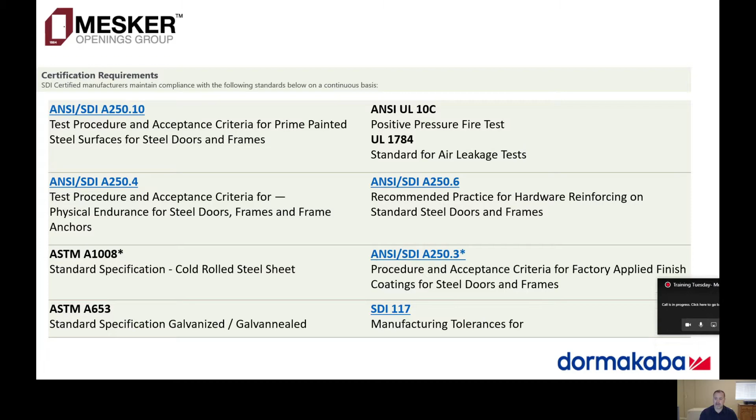This company is SDI certified, and unlike many other companies out there, they don't just provide material that meets SDI standards—they're actually SDI certified, so they're never going to make that false claim. That SDI certification means quite a bit, especially with testing for tolerances, testing for twist, bow, and other defects. Having that SDI certification means not only that you have a certification behind you, it also means that your products have been tested in a rigorous way so they can perform for you when needed. So we'll go through and watch this short video that talks about SDI, what that certification is, what it means, and that sort of thing.

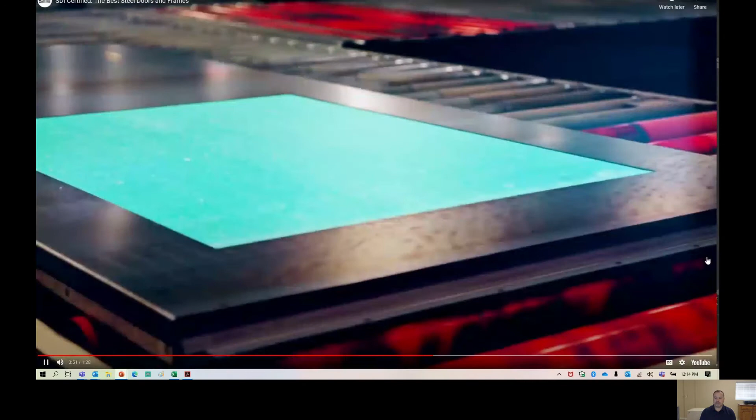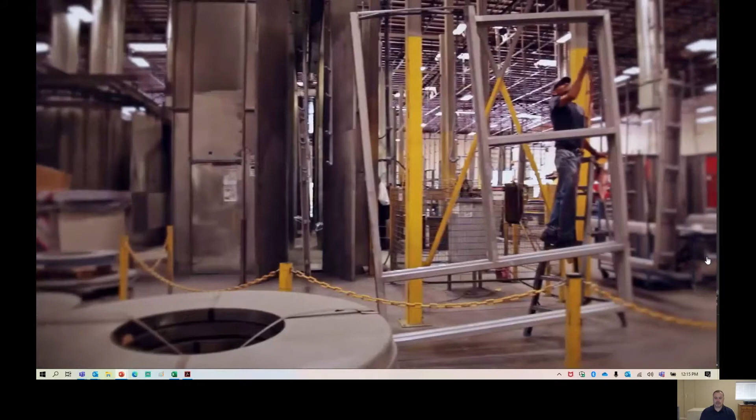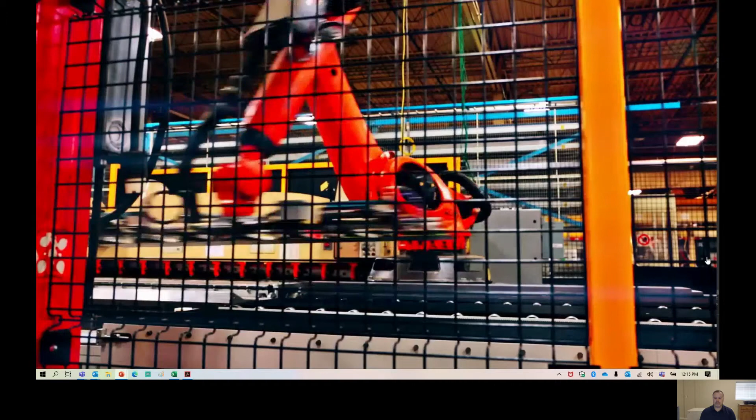Doors are one of the few components of a building that people are constantly in contact with, and often provide the first impression of a building. Many of them are in use all day long. The fact is, some manufacturers make better ones than others. Choosing quality doors and frames helps ensure they look good and perform well for many years to come. Specifying to ANSI and SDI standards is a great first step, but how do you know which products actually meet those standards? To ensure architects receive the quality of product they specify, the Steel Door Institute has developed an industry certification called SDI Certified. The manufacturers with this certification are audited to verify their manufacturing processes consistently produce quality products. Their steel meets ASTM industry standards. The fabrication, finishing, and physical endurance comply with ANSI and SDI standards. Many of the most respected steel door and frame manufacturers are now SDI certified. They make standard, custom, and specialty products available in 50 states and around the world. Architects can specify SDI certified and know that the doors and frames in their buildings will be built to last.

What does that mean as far as SDI certification? Basically, SDI means that those products are tested, they're reliable, and they hold that backing from the Steel Door Institute that shows they are quality.

Some of the members of SDI are very familiar to you, like ASSA ABLOY companies such as Ceco, Curries, Security Metal Products, and Allegiant products, which includes Steelcraft. But there are also some no-name or smaller companies out there that are SDI certified that we primarily see in the South, but also up here, and those are Dean Steel, DCI, Republic, Pioneer, and MPI.

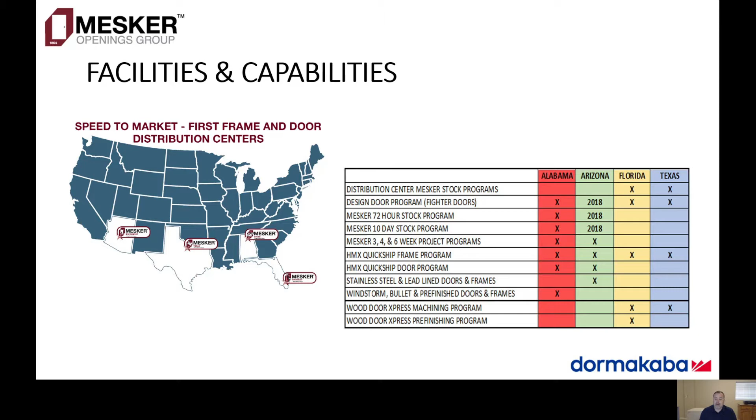If you look at Texas, they have their Mesker, all of Mesker's stocking products, such as your standard hollow metal frames, 4 7/8, 7 1/4, your flush doors, your 4070, your 3070 - just your standard material. But then they also have the hollow metal quick ship frame program, wood door express machining program, and I believe they now also have their hardware piece associated with this as well, especially Mesker out of Texas.

So Mesker and Hollow Metal Express, what are the differences between the two companies? Mesker is going to be your contract house. Basically, it's going to have all of your stock materials, even if they're not providing those stock materials in 1 or 2 days. If you have a large contract order that's going to require 20, 30, 40 frames or doors, they're going to provide those in a standard lead time. Check with your factory or your local rep prior to placing that order to find out what those lead times are currently, because they are ever changing, especially now that we are opening up new branches. So check with us prior to placing that order, so we can give you a reliable answer.

Hollow Metal Express, on the other hand, is more of your custom house. There are some things changing internally right now, but currently they are your source for custom hollow metal. Mesker does custom hollow metal as well, but Hollow Metal Express is going to do your lead lined doors, your stainless steel doors, your custom windows, your custom lites, and things like that. And they're going to be able to do those a lot faster than Mesker will.

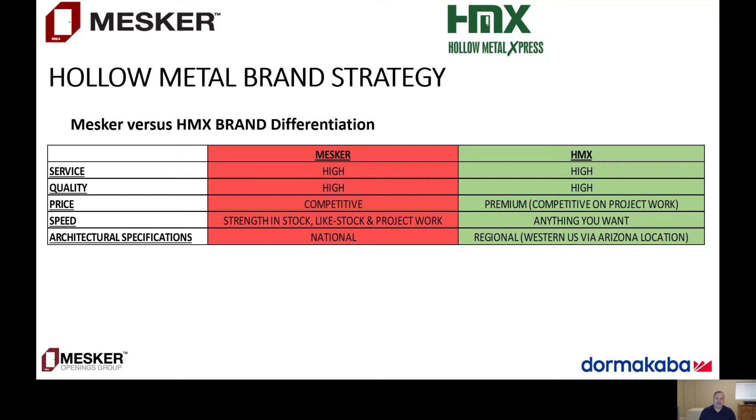Mesker, I was saying this in our Training Tuesday meeting, but I'll say it again. Mesker is a company that has hidden Meskers across the United States, and there are actually websites out there, not brand associated, run by people with an architectural background, who go out looking for hidden Meskers, openings, hollow metal storefronts and things like that that have been lost throughout the process. You really have architecture out there that's been around for 100, 150 years, and some of those hollow metal storefronts out there are Meskers. That's the name they've become known for. But Mesker and their hollow metal storefronts are very special. They're nationally known, they're in most specifications, and if they're not in a specification, they're very easily written in.

So let's talk about doors and how doors are constructed. I have a door sample here. I'm going to be switching screens, so bear with me. As you see, I'm grayed up, so technology sometimes is a problem, but we'll get through it as best we can. I'll switch back and forth so you guys can see me. Again, bear with me. So, door construction.

As Mesker will claim, they use a standard of 18 gauge hollow metal. They do have 20, 16, 14, and 12 gauge available in their doors. 20 gauge is going to be your low end commodity style door. 18 gauge is standard, your standard interior hollow metal door. I would not suggest it for exterior use, but it does have a place at exteriors in strip malls and things like that. Most exteriors are going to use 16 or 14 gauge, and your extra heavy duty is going to be your 12 gauge.

There's going to be very low instances when you're going to need a 12 gauge door, but I would say at bullet resistant openings, windstorm rated openings, tornado openings, things like that, you're going to see those openings there.

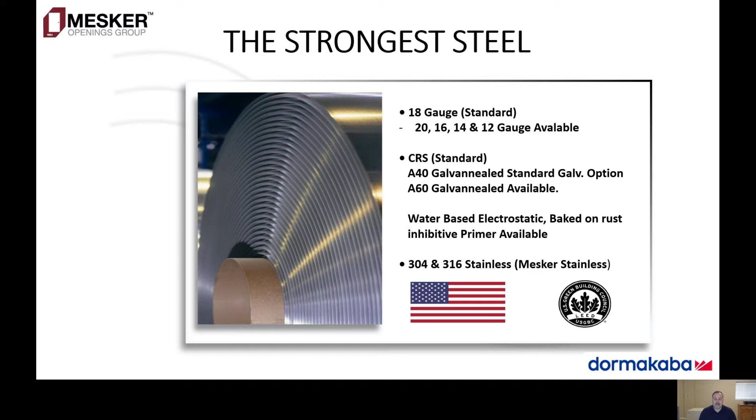Their standard is a cold rolled steel. They do offer an A40 and an A60 galvannealed. Their primer is going to be a baked on rust inhibitive primer, which is standard in the marketplace. And they do offer a 304 and a 316 stainless steel hollow metal door.

The way that they build their doors is going to be the pan and lid design. It's a standard design, also standard across the marketplace. We're going to talk about a door called the NVS that is a little bit different in some later slides, but the standard one we're going to talk about now is the pan and lid, and I'll show you how it's built in just a second.

The design of the door is an adaptable non-handed design, which is their standard. What that means is it's square edged on both sides, and it is adaptable. So if you need to plunge through at your hinge pockets and things like that, you can switch the hand of that opening. They do have it plunged through already as part of their standard, so you can rehand it. But if you have a situation where the door is handed, you can modify it in the field to make it work, just in case you wanted a right-hand door and actually needed a left-hand door.

They do offer a beveled hinge or a beveled lock edge and a beveled hinge edge. It's an option, and I believe it's 1/8 inch on 2.

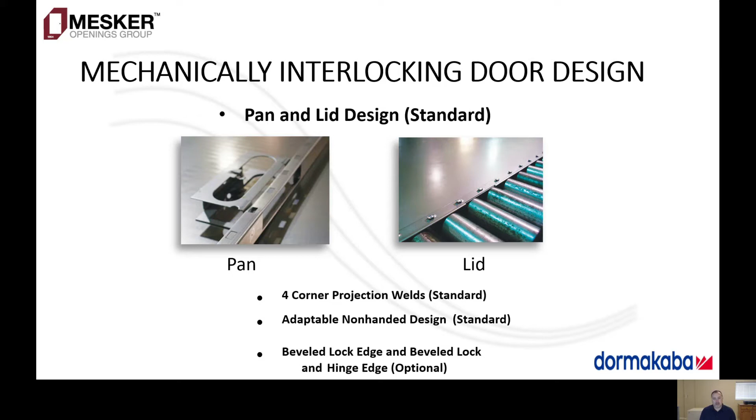So looking at the pan and lid, you can see the bottom where it's bent. It's bent twice, first to create the lock edge or hinge edge, then bent again to receive the lid, and that's your stability point at the lid. You see at the bottom there, that's where they weld it together. It's tack welded all the way down, sanded smooth and finished.

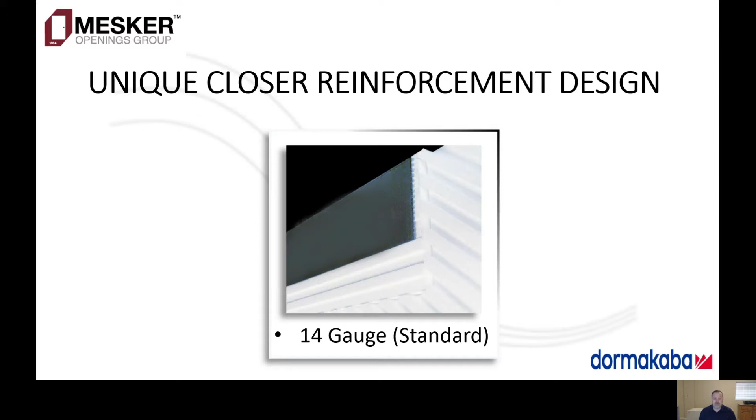They do have a unique closer reinforcement. If you look at this closely, it's a 14 gauge standard reinforcement, but that closer reinforcement is a little bit different than you normally see on hollow metal doors. If you look at the polystyrene around that hinge and closer reinforcement, you notice that it has treads in it, and at the closer reinforcement the treads are actually opposite. What that does is provide more stability, not only with the closer reinforcement itself, but also from that tread, so it's not just a piece of material that's stuffed in and welded on.

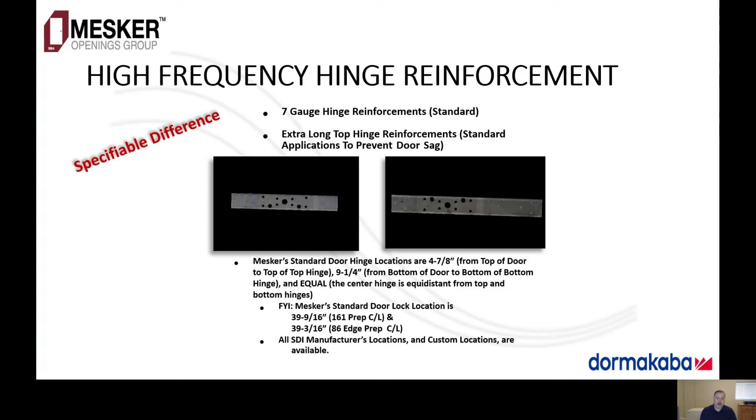They have high frequency hinge reinforcements made out of 7 gauge material. That high frequency reinforcement prevents the sag and things like that on the door. So if you have a heavy duty door and things like that, all the weight is at the top of the door, and this will allow you to hang that door without worrying about your hinge breaking or failing in the process.

So this is where I'll change to the video. I'm going to show you a couple things, but please look at the inverted and the flush top cap, and then we'll take a look at it real quick.

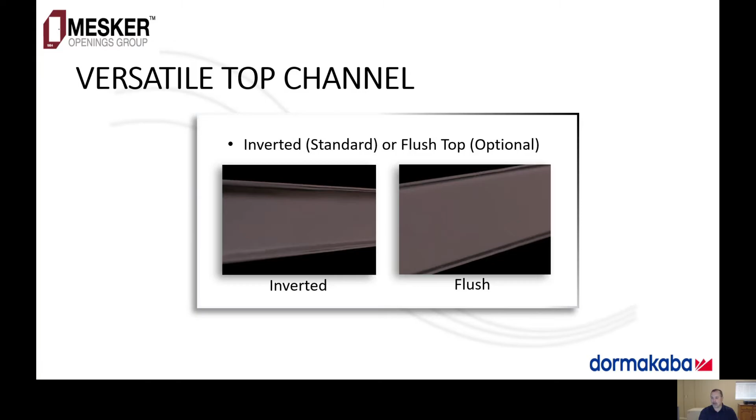So, hey there, I'm back. Like I was saying, take a look at the top cap here. This shows a top cap, and if you take a look at it, you'll notice that top cap has a hat channel at the very top, and that's this right here. What that does is whenever you slide this on top of the door—and I actually have a sample of a door—when you slide this on top of the door, like so, it creates a flush top. I mean, honestly, like that.

This door sample is going to be used for something totally different. It's not the top of a door, but if you look at that hat, on the edge of the door where that reinforcement is, it sits on it just like this to allow it to sit flush. If you look at the sides here, this allows it to slip into the top of the door and then compress to the sides, so you can install it into the top of the door with no need for screws. You can put this on flush and leave it as is, or you can dimple the top and screw it in for a screwed-in top cap, or you can weld it or tack weld it and fill and sand smooth, depending on what the specifications say. That way you can have any type of top cap that you want.

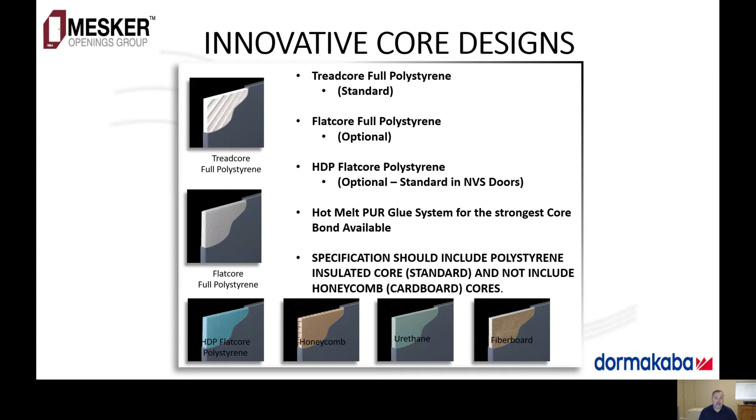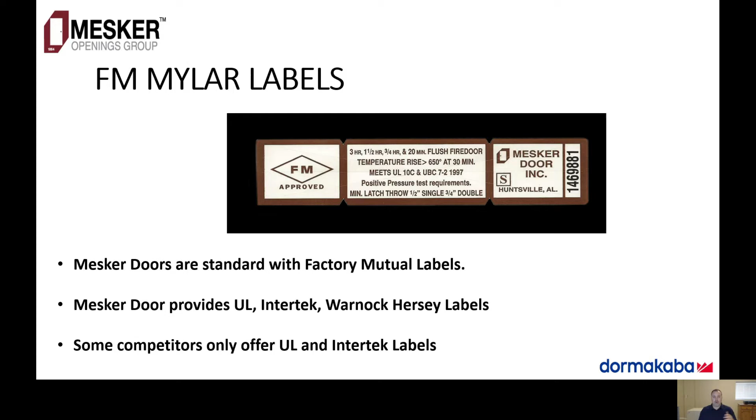Our fire rated openings are put on with a Mylar label. They are certified with UL, Warnock Hersey, and Intertek. Some other manufacturers out there are only available in one or the other - they're not rated with all of them. The N series, which is what we've been talking about, is your seam-to-edge door. It's a non-handed door that meets the requirements of virtually any opening, from sound deadening to energy. It meets and/or exceeds ADA, ANSI, ASTM and SDI. Their fire rated openings are 20-minute up to 3-hour, and they use Mylar labels and are also certified with Warnock Hersey and Intertek.

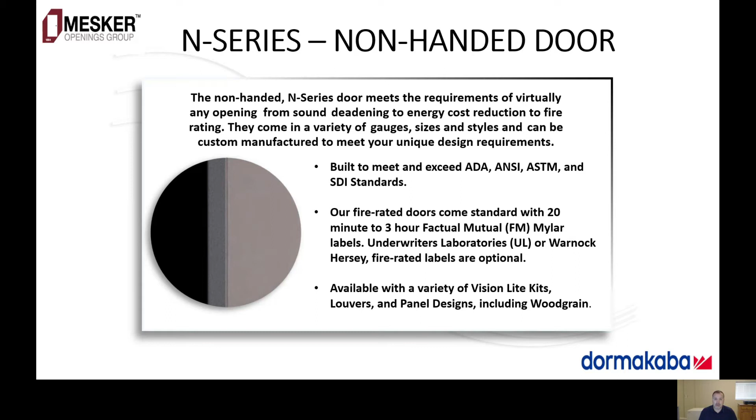They come with a lot of different standards, so depending on what your architectural plans say, they can do vision kits, wood grain at exteriors or apartments, and different types of panel designs if you need something more aesthetically pleasing than a flush hollow metal door.

They also offer a BV1, or beveled edge design, as an option. So if you do need a beveled edge, it's provided the exact same way as the square edge, just bent a little bit differently - it's an 1/8 on 2 inches. It's built to meet or exceed ANSI. They offer them beveled at the hinge only, beveled at the lock only, or beveled at both the hinge and the lock.

So let's take a look at some steel stiffened doors. Steel stiffened doors have been around forever, and Mesker offers steel stiffened doors as well. They offer it in their NVS, they offer it in their N series, but we're going to see some pretty strange things whenever we're looking at the NVS continuously welded polycore, the NVS steel stiffened core, the standard seam, and then the standard seam steel stiffened.

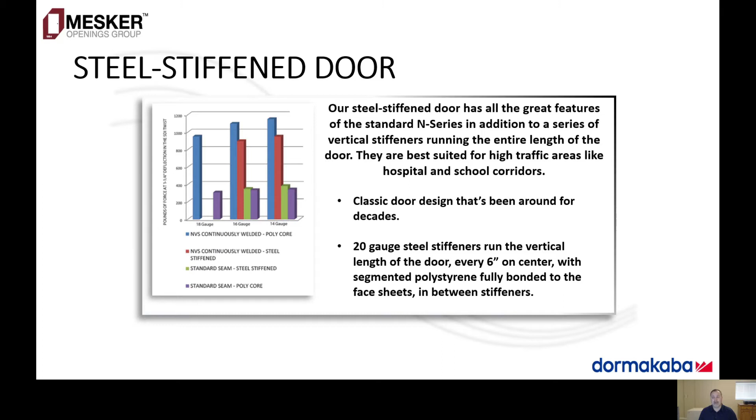Whereas we've seen with the standard NVS, not steel stiffened, that can hold over 1,000 pounds of pressure at their 14 gauge. And whenever it's recoiled, it's only out 1/32 of an inch. Unbelievable ability, with only one thing that's different on the door, and that is this right here.

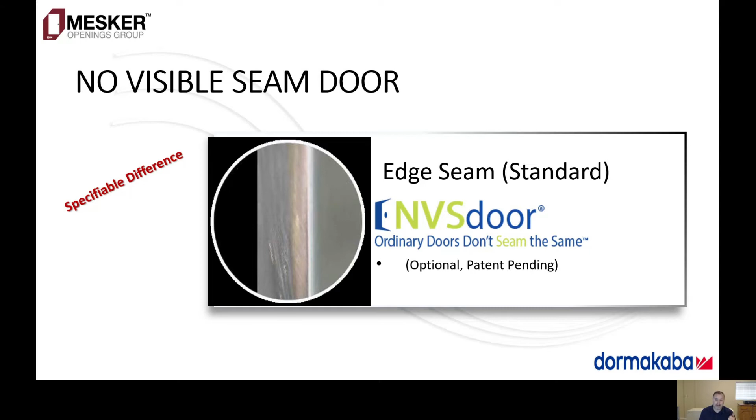The NVS offers an edge seam that's continuously welded vertically down the edge, and what it does is it provides a situation where that door has now become stronger because it's an entire unit, as compared to NVS that has steel stiffening, standard steel stiffening, or a standard door.

So to put that into a broad perspective, the NVS, which is fully continuously welded, is 3 times stronger than a standard hollow metal door. It has smooth faces. It's not like your seamless edge steel stiffened door, your seamless edge standard door, where you have a seam on the edge that's been filled or tack welded all the way down the field.

What happens is you get those pock marks or cigarette burn marks. I just call them defects, where you have those holes blistered down that edge. A lot of manufacturers will fill the entire edge, sand it smooth, and what you have is, over time, if that door does come under pressure, that stuff is going to crack off, break, or if you have to modify that door for any reason, it's going to fail, and you're going to end up having to rebondo, refill, and do all this work. Whereas with the NVS, it's continuously welded. You don't have to do that.

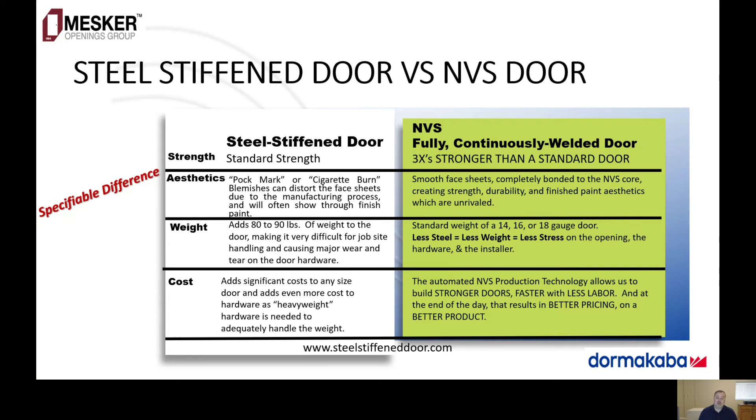So you're going to have a situation where you can close your door better, swing your door better, open your door better, and provide a better door at a better price. So the NVS door is something that is very unique, and I would suggest getting with your local representation, getting some quotes on those doors, and putting them in job sites, because your customers will start thanking you for it.

So as we talked about just now, we looked at the competition doors, and you see that seamed edge, and then you see how it's filled in later on. They have to fill that entire thing, because if you just fill in that small little crack and try to paint over it, you're still going to see that crack. If you look at the NVS door, they continuously weld it, and at the very top you can see that continuous weld. They sand it smooth, they finish it, and it's done, and it's done forever.

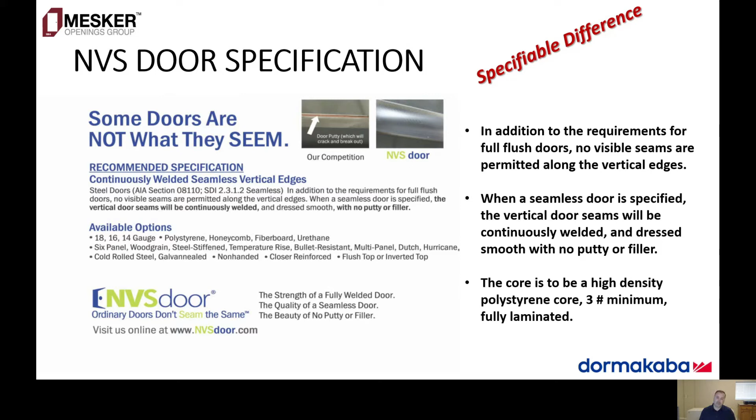I'm not going to go through everything here, but basically the NVS is available in all the same stuff that you would get your standard door in, but one thing, you can't get it in 12 gauge. It's available in 18, 16, and 14. You can't get it in 20, you can't get it in 12. It's available in 6-panel, wood grain, steel stiffened, temperature rise, bullet resistant, multi-panel, Dutch door, WINDSTORM, cold roll, galvannealed, non-handed. You have most of the options out there, but the two most notable things, 20 and 12 gauge, it's not there.

So the wood grain, very important. The wood grain looks like a wood door, but it's hollow metal, and it's able to be stained. There are factory finishing options available. I would suggest not doing that, but they are available. They're just expensive.

This looks like it's one of those situations where it's going to be in a multifamily style opening, and you have the top lock, the bottom lock, so you install this in multifamily. It's available in 20-minute rated or 90-minute rated, and it looks like a wood door. So you still get that aesthetically pleasing opening without having to compromise by just going with a wood door.

So let's look at some temperature rise options here. The temperature rise door series is with that HDP polystyrene core. If you look at the temperature rise or the heat transmission as tested by UL, their design in conjunction with premium fiberboard core will keep the side of the door not exposed to fire below 250 degrees for 30 minutes. This is superior to the competition, which is 400 degrees, which can remove human skin if touched.

So Mesker's temperature rise doors will keep the side of the door that's not exposed at a hot 250 degrees, but 250 degrees isn't going to melt your skin off when you touch it. So keep that in mind when thinking about temperature rise openings. Mesker's door keeps it at 250 degrees for 30 minutes, and that's very important.

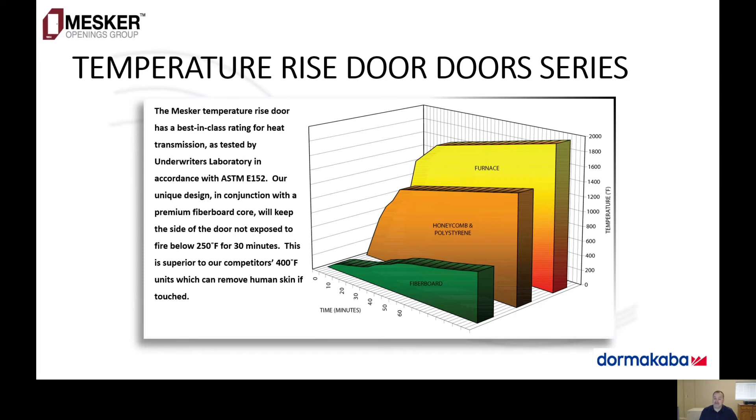Let's take a look at some Dutch doors. Dutch doors are available also, in the N series and the NVS series. One thing to note here, the Dutch door shelf is optional. You can have it either factory applied or sent with the door. But if you get that shelf, it's only available in 20 minutes.

And if you use this as a fire rated opening, 20 minute or 90 minute, you have to have a constant latching bolt at the top leaf. If not, it will not meet NFPA 80 or 101. At the 90 minute rated opening, the Dutch door shelf is not available.

Thermal performance, or their urethane core, and I switched up the temperature rise in the thermal, so I apologize for that. The temperature rise is your fiber board, which is typical in your fire rated openings. Thermal, which is going to be your R rated openings, is going to be the HDP urethane core.

Be careful with the urethane core, because you want to make sure that it is HDP, or a declared product, because urethane by itself is not very good for nature. The HDP, however, is going to be a declared product. It's recycled material and things like that. It's not, say, healthy for the environment, but it's not putting anything back into the environment that's worse.

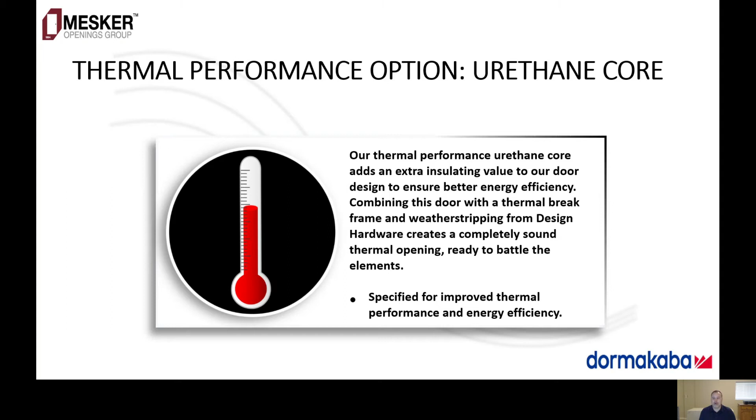So with their temperature, thermal rise, or thermal performance option, they offer this in thermal break frames and weather stripping from the design hardware group. It creates a sound thermal opening ready to battle the elements. They offer kerfed frames and a thermal break threshold at openings, creating a situation where the door stays cold on the outside if it's cold, or hot on the outside if it's hot, and cool on the inside. So it doesn't have all that release or transmission from your air conditioning unit, or that release of heat going through your building, which causes higher cooling costs.

They offer bullet resistant doors in level 1, 2, and 3. Level 1 is 38 caliber, small arms fire and things like that. Level 2 is up to a 357, and level 3 is your super power 44 caliber resistance. They offer these up to 4 feet in width, 10 feet in height.

We don't really worry about this too much in Colorado. They do have it in the eastern and southeastern portions of Colorado, but they do offer tornado or FEMA windstorm certified openings. Check with me prior to ordering those, because if it's windstorm certified, you have to order the entire assembly.

This is something that I hope we never have to deal with in Colorado: hurricane assemblies. This is something that they offer. So if you do have projects on the west or east coast that require hurricane certifications, we do offer those. Get with me and we can talk through those.

So for frame construction, I have a big sample of a frame. I'll run through these pretty quickly, but I really want to show you the sample, because that's where the meat of the whole thing is.

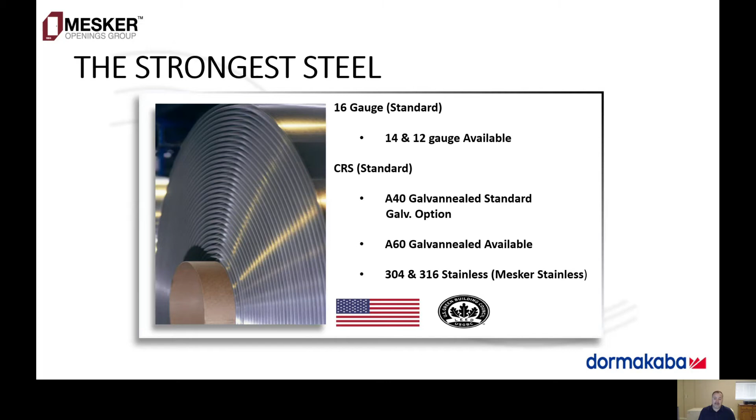Basically, standard 16 gauge is their standard. They offer 14 gauge, they offer 12 gauge. They do not offer 20 gauge - that's reserved for your Timelys, your ready frames, and things like that, that's your 20 and 22 gauge. Their standard is cold rolled, and they also offer an A40 and an A60, as well as 304 and 316 stainless steel.

Their design, and this is where I'm going to switch off now, is a 4-tab locking system. I'm going to go through and show you everything that we're going to be talking about in this slideshow, and then we'll come back to it. But for now, I want to show you some of the cool things that we have here. It's kind of embarrassing to have a hollow metal frame in your house, but we're hardware nerds, right?

So let's take a look at this hollow metal frame. I'm going to put this in my chair here so you can see it. This is your hollow metal frame, a standard hollow metal frame. As you can see here, this is the miter cut - it's the design of most standard hollow metal frames, but let's talk about frames in general.

If you do not know about frames, we have the face here, the rabbet here, the stop, the soffit, and then it repeats itself on the back side. Now what does all that mean? The face here is the aesthetic portion of the frame - it's where everybody's going to see it.

The rabbet is going to be the portion of the frame that is viewed from the door - it's the portion of the door that the door fits into, the rabbet of the frame. And then the stop is the portion of the frame where the door stops on - it's where the silencers reside, where your weather stripping, your smoke seal, things like that reside. And then your soffit right here, this is what helps project the width of the frame and create stability for both sides of the frame. The opposite side is the rest of it.

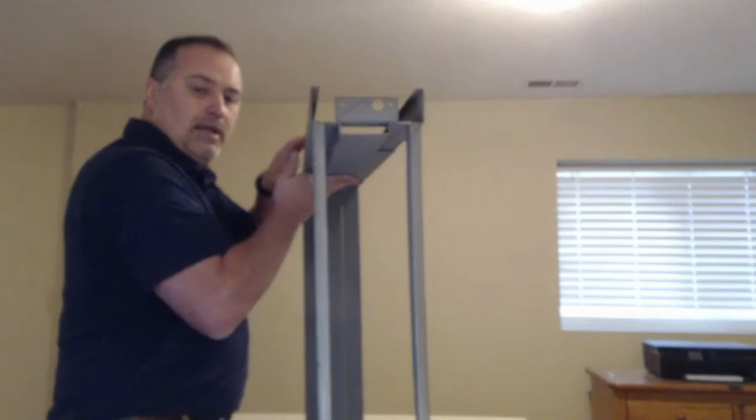Something else pretty cool that you need to see is your foot clip. Every frame is going to be provided with a foot clip, and what this does is allow you to anchor this to the floor.

Also, something important are these things right here. These are called spreader bars, and a lot of people in the industry use these to install their hollow metal frames, thinking this helps make sure their frames are square. You'll go out to job sites and see these things still on the opening. It's very important that prior to installation, these should be removed—they're just tack welded on, and they're pretty loose. They should be removed because they are not square.

You may find a situation where you think they're square, but they aren't. So what does that mean for installation? If you install with your spreader bars still on, you create a situation where you have a frame that might be out of square, might be twisted, might be bowed, and once you install that door, you're going to find out really quickly why you should have removed the spreader bars.

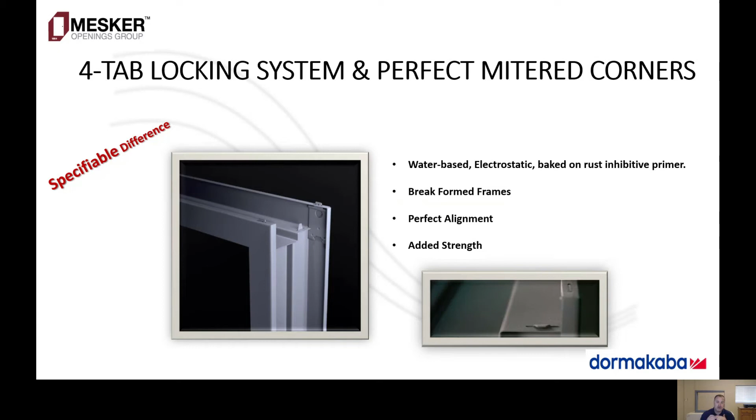So they show the four tab locking system, and basically what that is, it allows the head of the frame to slip on top of the legs of the frame. Then you can curve them over and lock them into place, so they are always going to be true and tight whenever those miter corners are being put together.

We talked about some of the profiles. I'll start looking at this now because it's pretty important: the drywall and masonry differences. If you look at a hollow metal frame, it has a return on it after the face, and that allows stability whenever that frame is installed against masonry block. I'm going to stop sharing, and I want to show you what that looks like.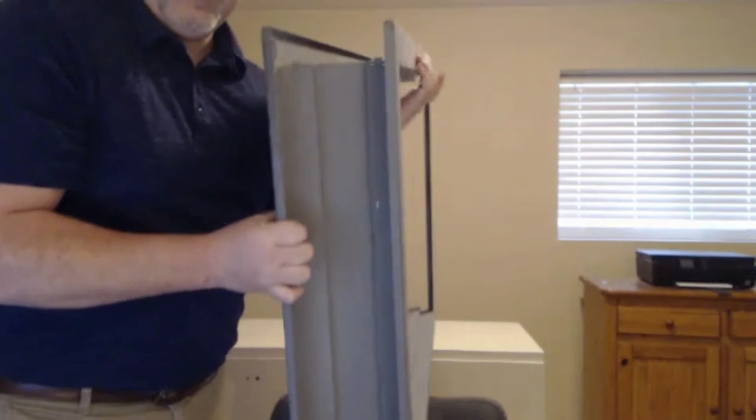So this right here is a profile for a masonry frame. As you can see, here's the face, and as it bends back over, there's only one bend here. This means that it's masonry, and it sits flush with masonry block. Whether you want it to sit flush here will depend on how you order it, but this portion will sit flush on the masonry block.

If you order this in drywall, you'll have an extra return going down right here. That provides you with the ability to slip the drywall in behind the frame. It creates kind of a rigid point where it doesn't pull back.

So that being said, we've talked about masonry, we've talked about drywall. There's also pocket door frames. A pocket door frame is basically, to make it as easy as possible, if you cut the soffit and the stop off on both sides of the frame, you'll be left with a cavity. That cavity can be used as a pocket door.

There's more to it than that, but basically we offer pocket door frames, so there's a void in the middle of the frame a pocket door can slide in and out of. We also offer kerfed frames and thermal break frames, which we talked about - you can see the kerfed frame on the bottom right. That's a frame where at the stop there's a cut or cavity placed into that space, so you can put in or kerf in some weatherization.

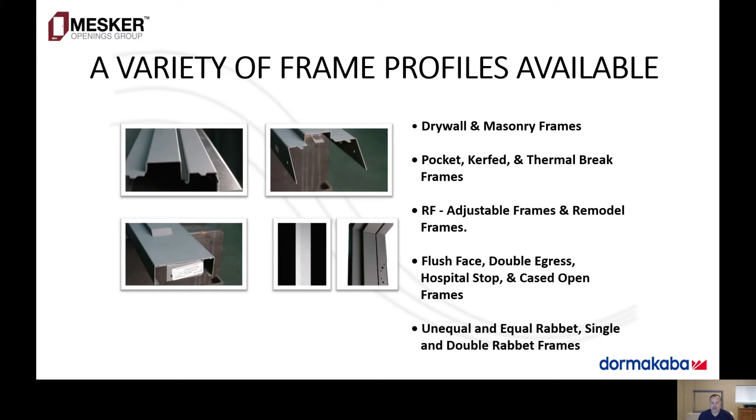So what's different about Mesker compared to some of the others? Mesker has sharp, crisp corners that are tight. I believe the bend is at a 1/16 of an inch round, whereas other manufacturers are at an 1/8 inch round. So with other manufacturers you're going to see a rounded corner, and with Mesker it's going to be sharp and tight - each bend is really tight and smooth.

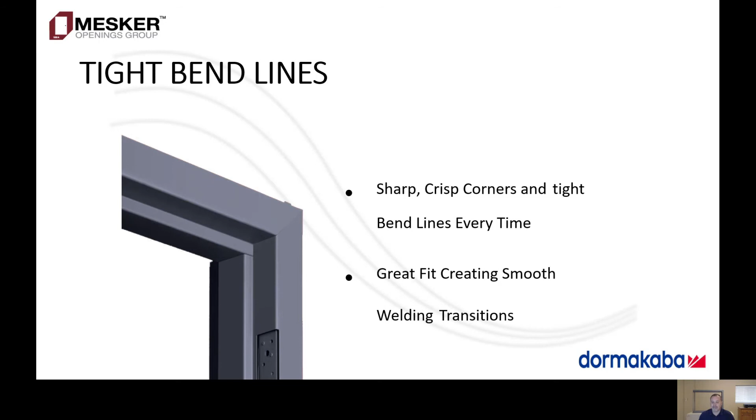Their components - we talked about earlier - are 7 gauge on your reinforcements, but they also offer plaster guards and things like that. They're offered as standard on all their hollow metal frames unless you specify something differently.

Their anchors are pretty cool as well - they create their own anchors in-house. They offer wire anchors, they offer EW anchors that are welded in, and they offer Z anchors. Z anchors are your steel stud anchor, formed in the shape of a Z.

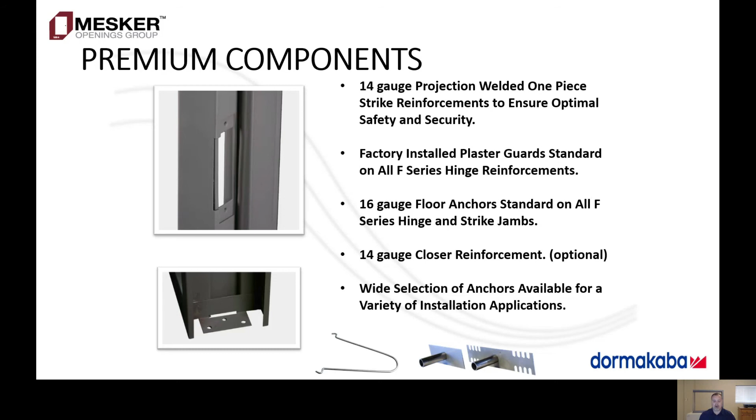You put it onto the inside of your frame and tack weld it on, or screw it on, or clip it on. Then on the back side you clip it to your steel stud, and you can screw it from the back side whenever you're putting your frame together. They also offer a variety of different clip-ons, clip-on EWA, multi-purpose anchors, and things like that.

We talked about the 7-gauge hinge reinforcement. Basically, their hinges are made of 7-gauge material. Where you'd really see this as an important tool is at your top hinge for heavier duty doors. Maximum load is at the top of the frame where the top hinge holds all the weight and gravity of the door, while the bottom two or three hinges, depending on door size, are typically used just as a pivot point. So it's very important for that top hinge to be reinforced, and they use a 7-gauge reinforcement to accomplish that.

Something to talk about here: Mesker's standard locations. We didn't talk about it in the doors because I didn't want to double up, but their locations are 5, 10, and equal. From the top of the frame, not the top of the face, but the top of the inside of the frame, at the rabbet down to 5 inches, that's where your top hinge is located. So top to the top is 5 inches, and then you have your 4.5 or 5-inch hinge.

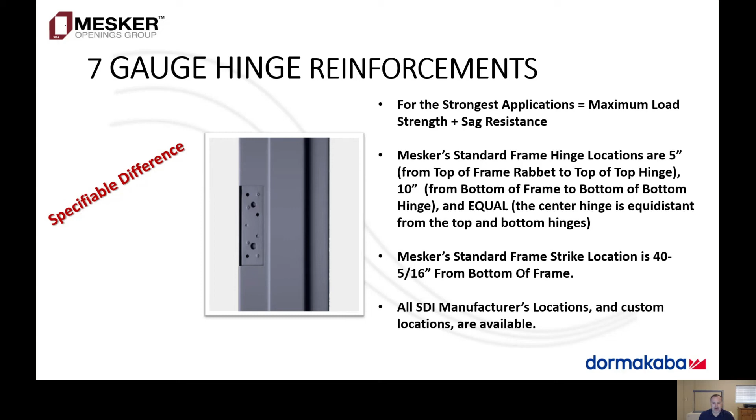I can't remember. So they're masonry frames. We talked about these and saw a sample of how they're made and built, so I won't go into that, but they are 3-hour rated. They're available in 12, 14, and 16 gauge, and in A40 and A60.

I would suggest against using it as a cold rolled application unless it's an interior steel application, because what many people don't realize is masonry walls suck in moisture from the outside or from the air and store that moisture in the block. The block itself isn't deteriorating, but everything around it that is steel will deteriorate. So if you use cold rolled steel on the interior thinking the sealed masonry block won't harm the frame, over time you'll see a difference.

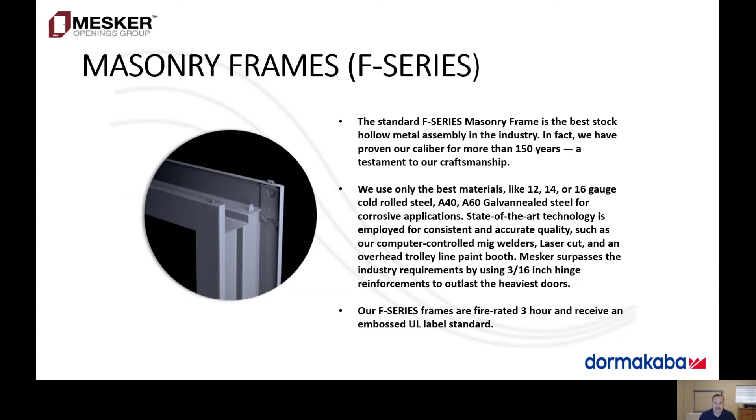So let's talk about their drywall frames. Their drywall frames are the FDJ, an AFTERSET frame, which is basically your hollow metal knockdown frame with compression anchors. It comes unassembled, and you put in the head and the legs, and you put in the compression anchors on the legs to install that frame. It's not like a ready frame or timely—it's more like a hollow metal frame that has not been welded.

So if you have a customer that wants a standard hollow metal frame but doesn't want you to rip out drywall to put it in, you can use an FDJ AFTERSET frame. You can put that frame in, bondo or fill over, or just leave open the compression anchors and be able to secure that opening and give the customer what they need.

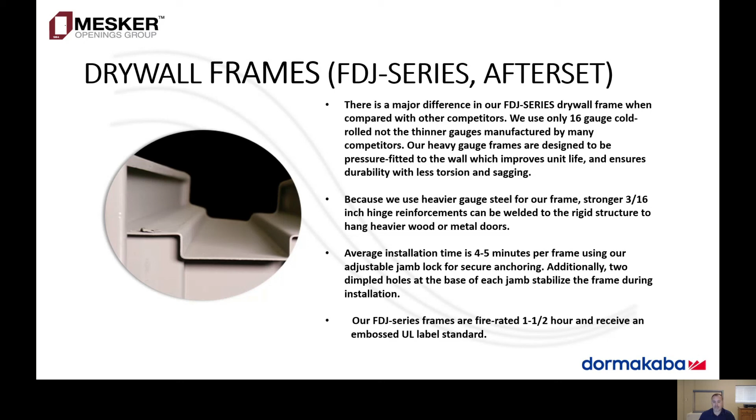Flush face frames, or the FF series. This is a really cool frame for this reason: it's offered without a face. You might ask why do that? Well, the main reason is if you have a customer putting up an apartment building and they want their own custom casing, you can put in this flush face frame, and your customer will be able to install their own casing around that opening, and it looks aesthetically pleasing.

So this is primarily used in a situation such as that, where a customer is going to have a finished wall and they want to put in their own casing.

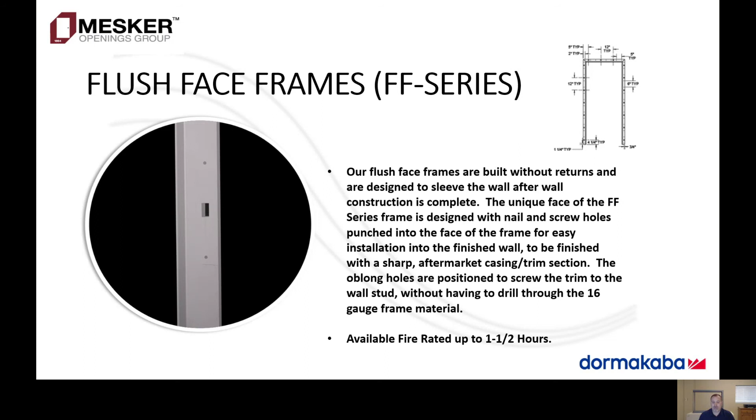Remodeling frame. This is going to be more similar to your timely and your ready frame, but with 16 or 14 gauge steel—still not 20 gauge or 18 gauge. This gives you the ability to install a frame in a space that allows you to put in your own casing. This is in a 6-piece kit, so you install your flush frame kit first, which is 3 pieces, and then you have 3 pieces of casing applied afterwards.

And this is a really cool situation for apartment buildings and things like that, where you want a situation where you remodeled an opening and you're not slipping it on over drywall. You want to put it butted up to finished drywall.

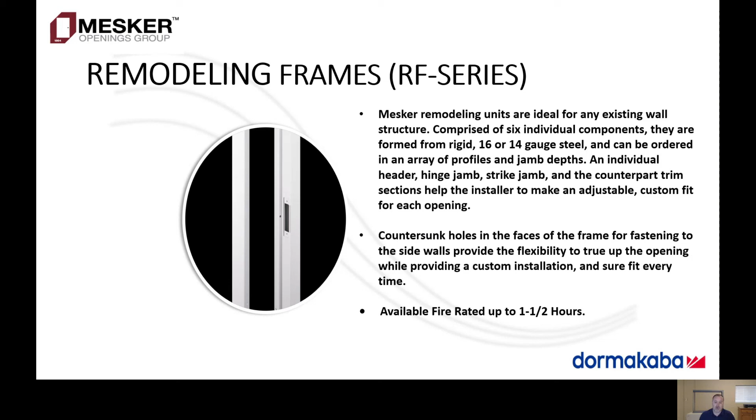This is going to be your piece for that. Now this is really cool.

The ADJ adjustable jamb comes in 2 types available: one's small and one's large. The small is for frames that are 4 5/8 up to 7 3/4. What it does is the frame literally slides into itself, and the soffit is where you're going to see the difference.

As you want it bigger, you just slide it out. As you slide it out, the soffit stays the same on one side, and the inch and 15/16 stays the same on one side, but the rabbet on the other side slides out to where you can make it. It's going to be an unequal jamb, but you can accommodate any size wall.

What's cool about that is you can literally have 2 SKUs for your frame legs in this adjustable series to accommodate walls from 4 5/8 of an inch up to 11 1/4 inch, and that's just for 2 SKUs. Then for your 3rd, or I guess 4th SKU, would be your heads, and you can make your heads 3, 4, 6, 8, whatever size you want. It's a really cool situation.

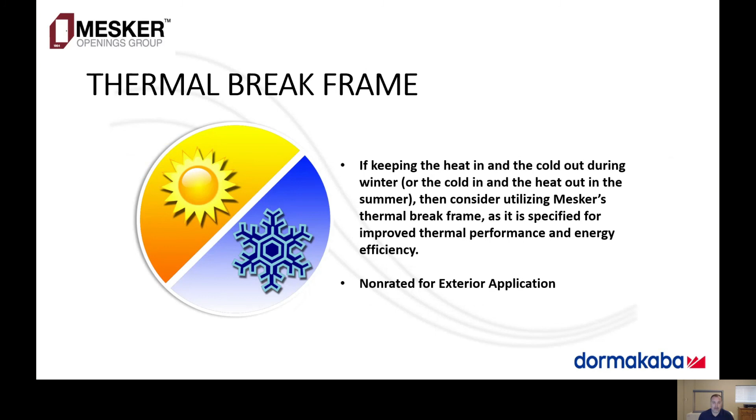So thermal break frames - we talked about the thermal break doors and thermal break frames already, so I won't go into it very much, but I'll show you what they mean by thermal break frame. This is it right here, where you have this kerf into the frame.

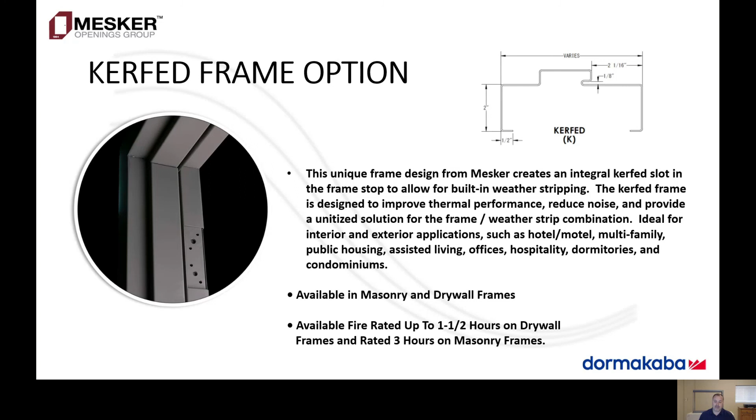You see that they took out and put an extra bend in where the stop is. What that does is it allows for a kerf to be put into that opening, so that you could have weatherization at that frame. At the very bottom, you'll have a thermal break weatherization saddle threshold that's thermally broken, and you'll have this kerf weather stripping. This causes heat or cold transmission to be stopped at the frame and at the door.

Hollow Metal Express, while they offer all the custom metal products we've talked about already, also offer stainless steel and lead line. So any place where you have hospitals or radiation, dental offices and things like that, Hollow Metal Express will be able to get you those openings in a lot faster time than any other manufacturer out there.

So just to recap some of that and go over what we've already looked at, I'll show you this quick video, and then we'll finish up.

Referring to this as the Hollow Metal Center of Excellence was not by accident. We want this to be the center of excellence for the products that are here, that are designed here, engineered here, and also become kind of a standard in industry. Center of excellence means excellence for the industry.

We were 40,000 square feet in the past, so we've doubled the size of the facility. 316 days to get this project from start to finish. We put a lot of energy into the building, and now it's time for us to recover and really deliver to our customers - that's the important part. And the other important part is, quite frankly, I'm proud to work here. I'm proud to be a part of this facility, and I'm proud to be a part of this entire organization.

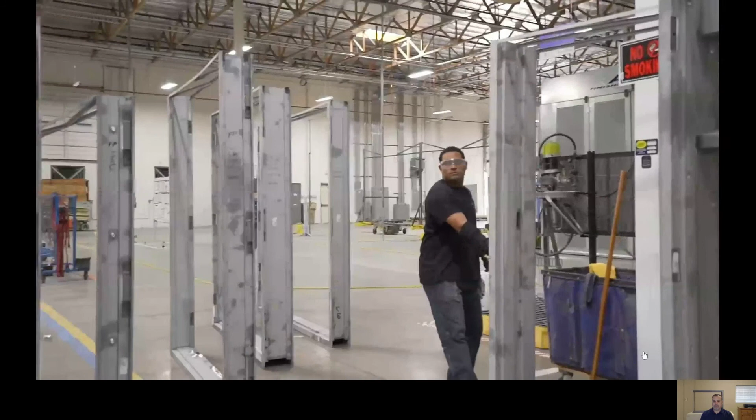Something important to note here is that not only are you getting quality and reliability from Mesker and what they've done for the past 156 years, but also you're getting the quality from Hollow Metal Express, backed up by the partnership they have after being acquired by Dormakaba to create this monster of a company that is pushing forward marketing, development, and production skills, building new facilities so they can now provide you an even better service.

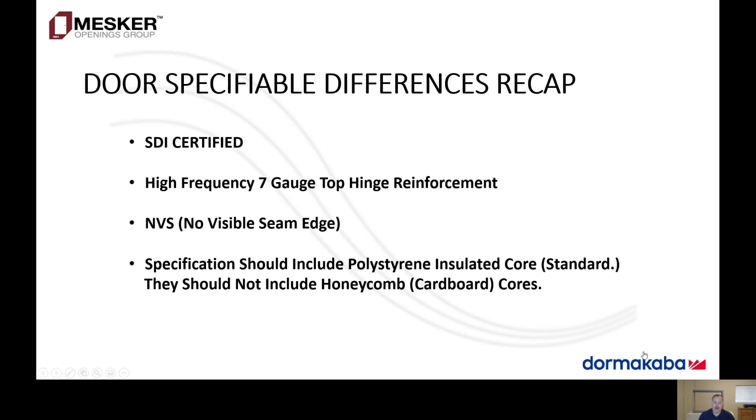So what are some of the specifiable differences in the door portion? SDI certified is the most important one. They use 7-gauge high frequency hinge reinforcements, the NVS or envious door with no visible seam, and the specification should always include a polystyrene insulated core, which is their standard, and not a honeycomb core, which you hardly ever see anymore. Most places are providing polystyrene anyway.

And with the frames, what's the specifiable difference there? Well, with the frames, they're also SDI certified. Along with the doors, they both have a water-based electrostatic baked-on rust inhibitive primer, which means they are going to inhibit rust from going onto those frames. I will suggest that anywhere you modify, cut in, scratch, or damage those frames, I would put a rust inhibitive primer over the top, sand smooth, prior to finished painting.

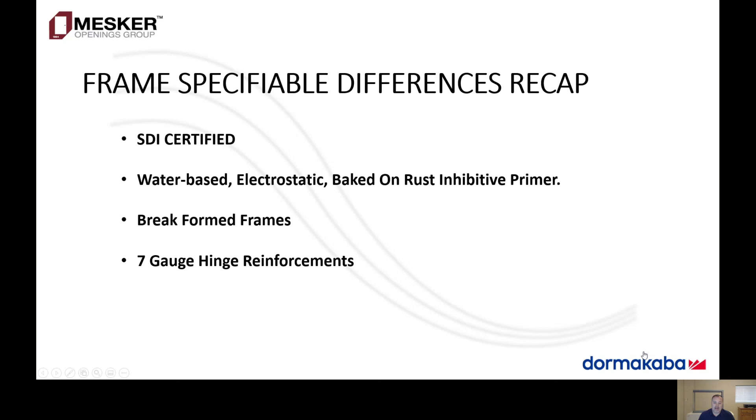The break form frames mean that the frames have tighter break lines and things like that, which means they're more aesthetically pleasing. They look better, they feel better, they act better, and they also have the 7-gauge hinge reinforcements. So that being said, I'm all done.

Some of the questions I received were about the kerfing. If the kerfing was provided with the hollow metal frames, I would say yes. Being able to be with the Design Hardware Group gives them a very unique opportunity to provide you with hollow metal and things like that, and I think that's very important and needs to be noted.

Another question we had was regarding Hollow Metal Express and Mesker, if they were provided and built with the same qualities and same standards in both factories.

Yes. So Dormakaba put in a lot of work to create two facilities that would perform and also provide door frames, not only on the East Coast or Central America, but also on the West Coast. And what that does is create a situation where the same quality, the same standards, the same material is being provided by both groups.

Now, where you're going to find some differences is that Hollow Metal Express is a custom hollow metal house. As you saw in the video, whenever they first started out, they were building hollow metal frames and doors out in the street outside, and now they're doing that in a 97,000 square foot facility. They have better products, better service, better reliability, and better quality control.